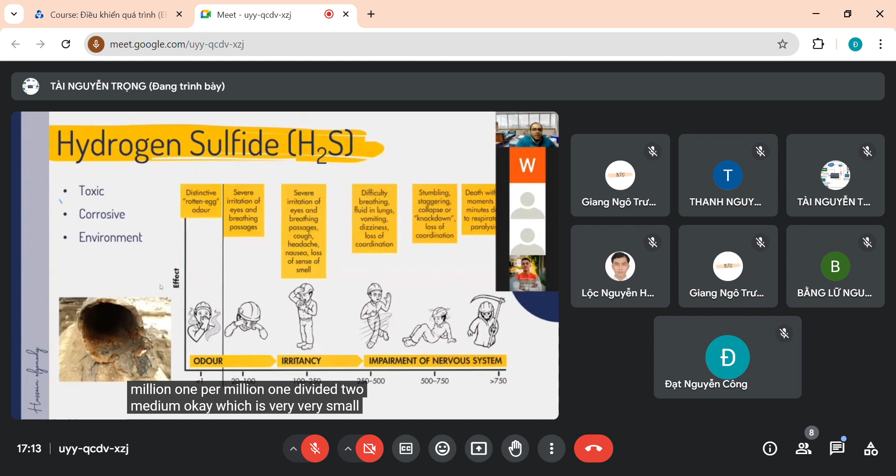Okay, the other contaminants are the non-combustible inert gases, such as CO2 and nitrogen. Why do we need to remove them? Because they have no value. They reduce the heating value of the gas, and they also take valuable space in the pipeline. Sometimes CO2, when mixed with water, becomes very corrosive to the pipeline and equipment. Okay.

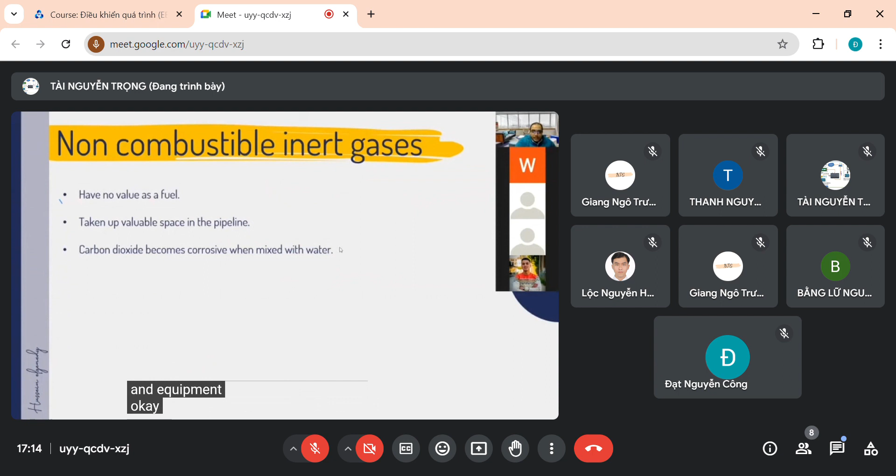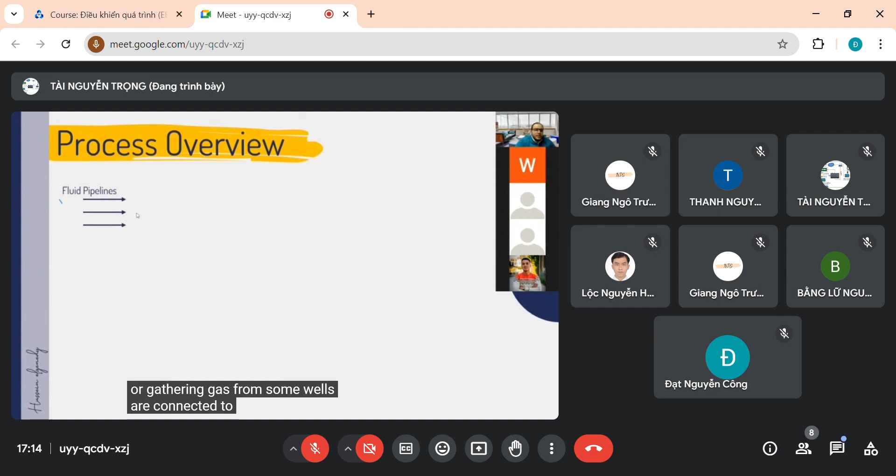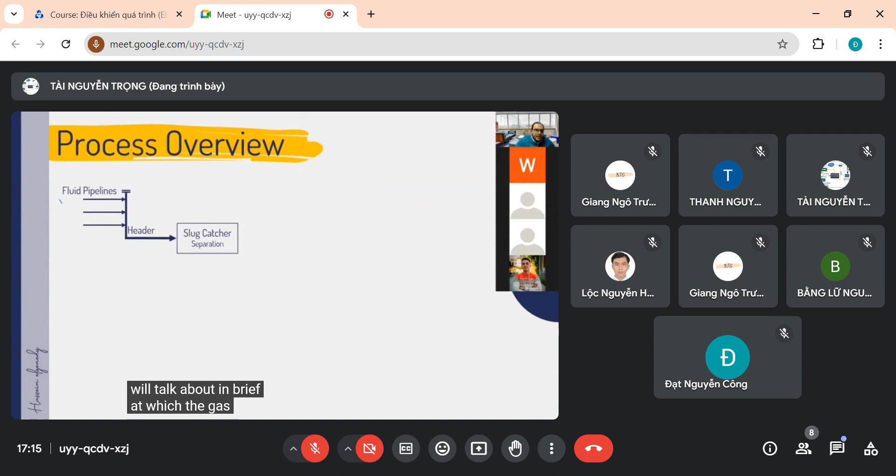Let's take a brief overview of the gas plant. In the gas plant, we have fluid pipelines, such as gas pipelines coming from different wells, which are collected into a gas header. The header is a bigger pipeline which collects the gas from different pipelines. After that, the first thing in the plant is the slug catcher. The slug catcher is a separation process, which we will talk about briefly, in which the gas is separated from liquid.

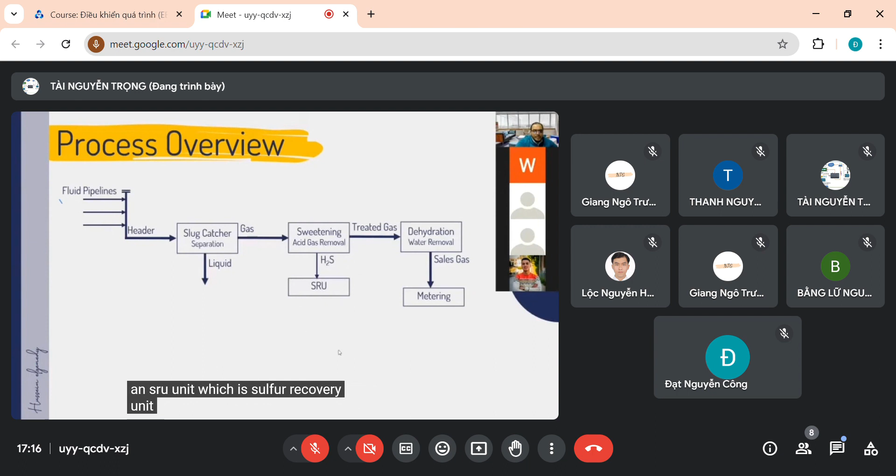After that, if the gas is sour, it goes through sweetening, or acid gas removal. Then the treated gas from sweetening enters the dehydration, or water removal, process. After dehydration, the gas is called sales gas, and it goes to the metering station, where we count the gas being sold. From the sweetening process, we have a byproduct, which is H2S extracted from the gas. The H2S is sent to an SRU, a sulfur recovery unit, where we recover the sulfur from H2S, and it can also be sold in the market.

The liquid portion is sent to further separation, because the liquid is mostly condensate, water and MEG. We will talk about MEG briefly in a moment. So the liquids go to separation. Mainly the condensate is sent to stabilization, and to metering to be sold as stabilized condensate. The water is sent to two important units, the SWS and MRU. SWS is sour water stripping, and MRU is the MEG recovery unit, where we recover the MEG. The SWS produces waste water without H2S, which may be reused in the plant or sent to disposal. Okay.

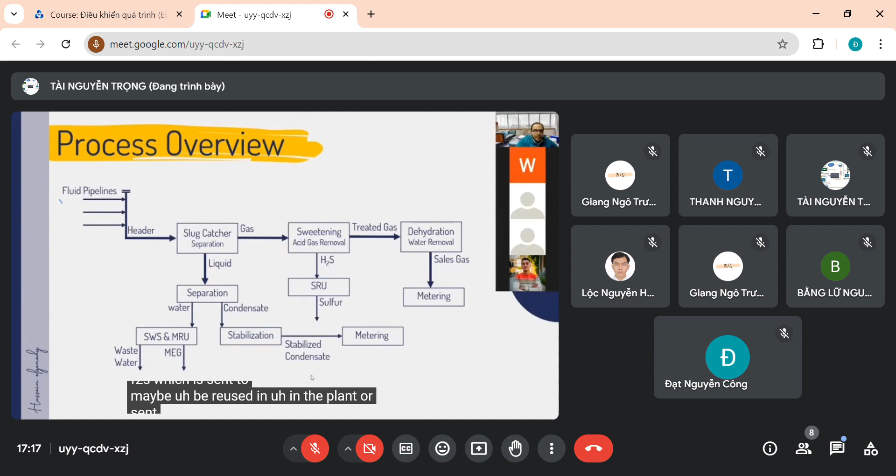The first unit in the plant is the slug catcher. What is the importance of the slug catcher? It acts as slug control. Sometimes, due to ramp-up and ramp-down of the well, we receive slugs of water or liquid, which we cannot handle with normal separation. So we use a separator called a slug catcher, a finger-type separator like this, which can handle the high amount of liquid coming from the wells. It is the first line of defense when it comes to liquids and slug control.

So when we are separating gas from liquid, we have to use something like that, especially when we expect the amount of liquid to change from time to time, and especially when the sea lines or fluid pipelines are far from the plant. For example, in our plant, Zohr gas plant, the wells are 200 kilometers from the plant. That's a very long distance. So sometimes liquid comes in slugs, and we need the slug catcher at the inlet. It also helps separate the liquid from the gas.

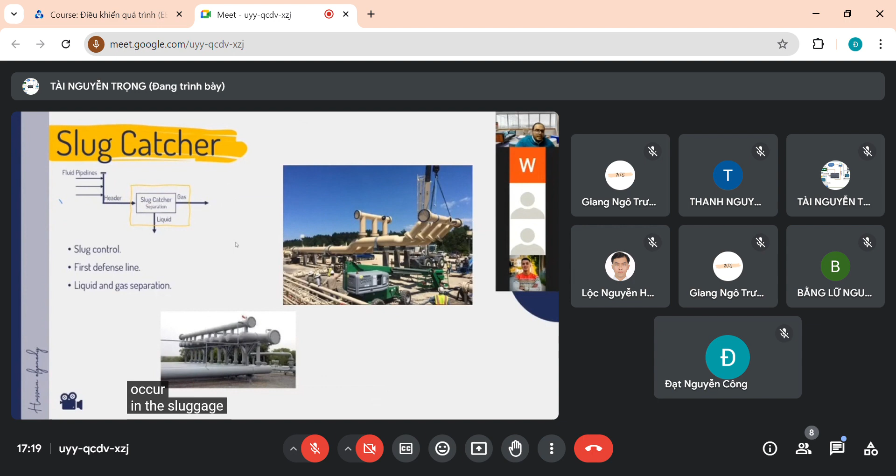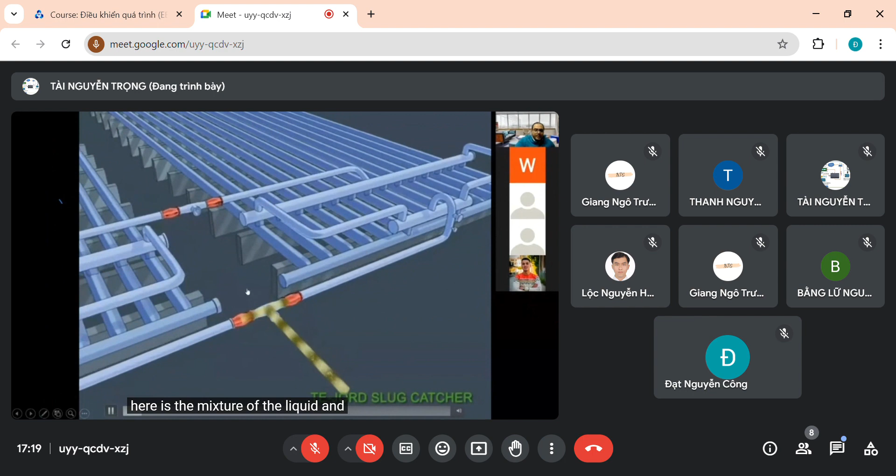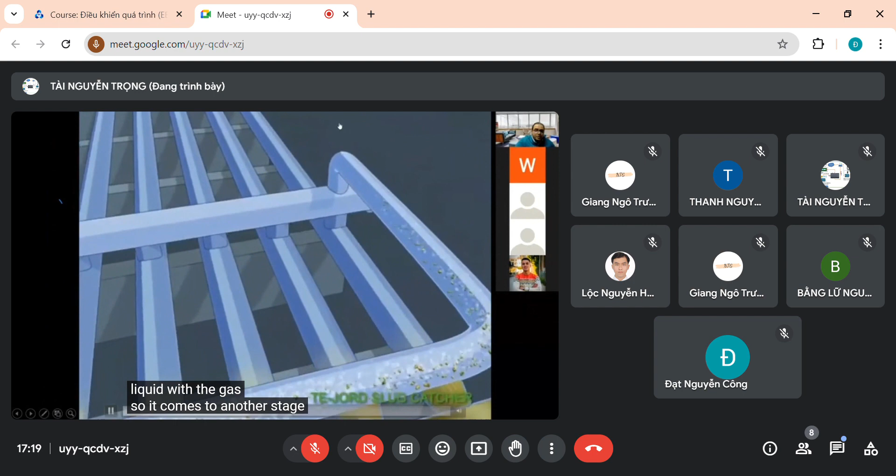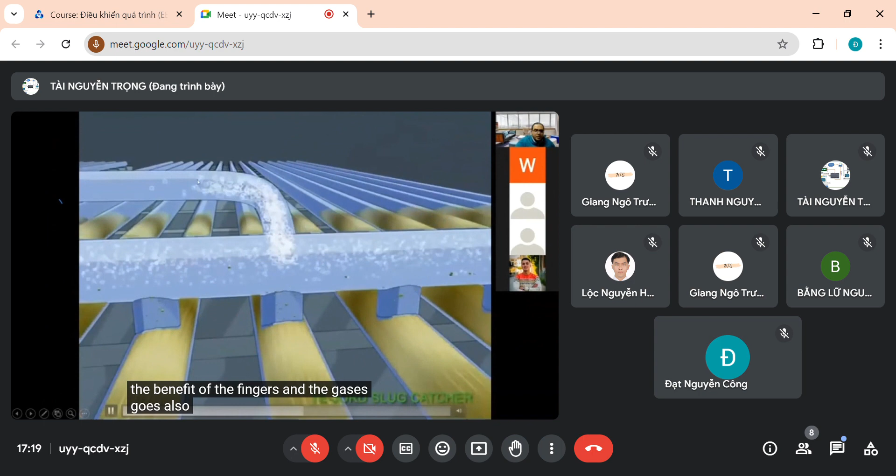Let's check this small video about the slug catcher to understand how separation occurs. Here the mixture of liquid and gas enters the slug catcher and moves like that. This is the first separation stage. The liquid goes down and the gas goes up through this pipeline. As you can see, there is still some condensate with the gas, so it comes to another stage of separation, where the liquid condensate goes down by gravity. This is the benefit of the fingers, and the gas goes up again and moves to a separate pipeline like this.

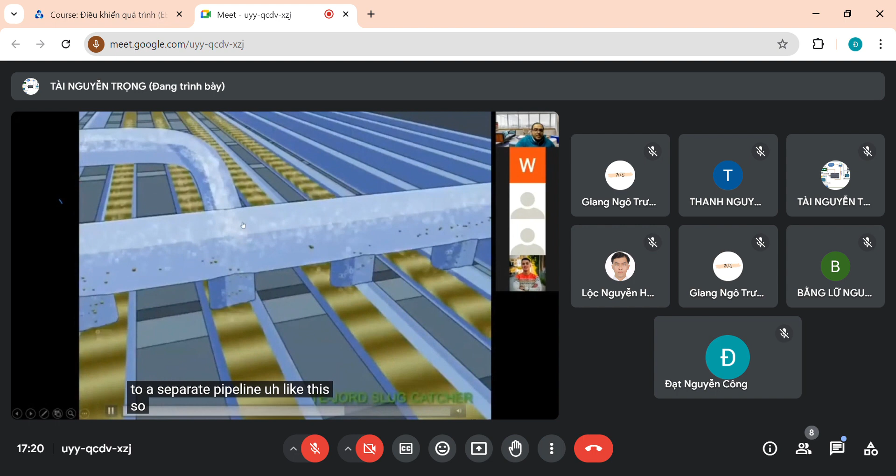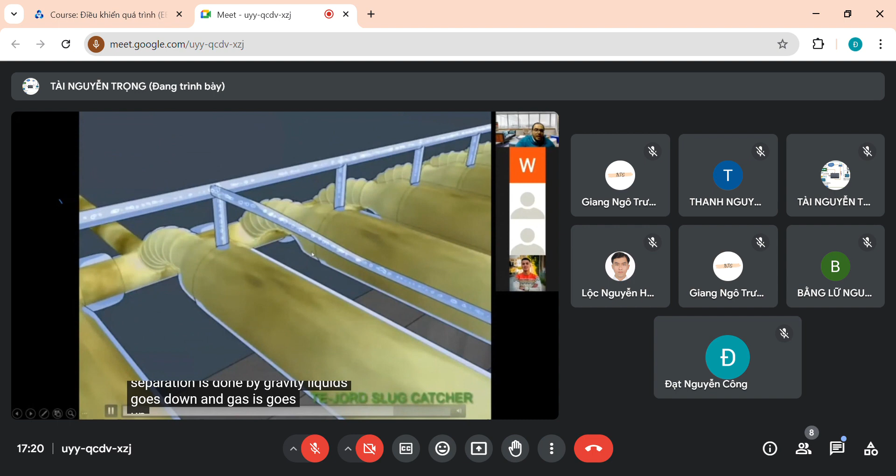So this is the importance of the fingers. These are called fingers, and the separation is done by gravity. Liquid goes down and gas goes up. This is the idea of the slug catcher. As you can see here, the gas is collected above and sent to processing, and the liquid separated from the gas is sent to further separation and the condensate stabilizers. Okay.

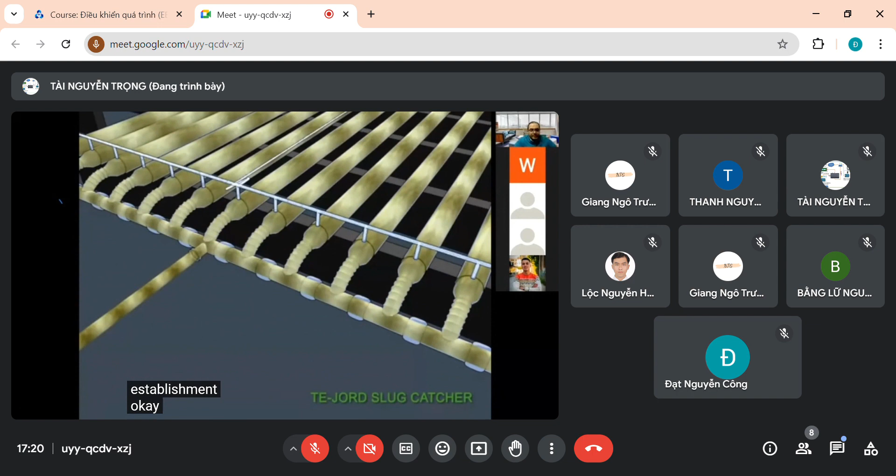The next process is the sweetening unit or the acid gas removal unit. The main purpose of the acid gas removal unit is to remove the H2S, but sometimes CO2 is removed with the H2S based on the solvent selected or the process selected. The most common sweetening process is the amine sweetening process.

The amine sweetening process consists of the absorber and the regenerator. In the absorber there is contact between the gas and the amine, which absorbs the H2S from the gas, and then it is sent to regeneration to separate the acid gas from the amine. The amine is sent again to the cycle, and the H2S goes to the SRU, and from the top the sweet gas is taken from the absorber to be sent for further

processing and dehydration. Can anyone tell me why it's important to do the sweetening process before the dehydration process? Anyone know why we do the sweetening process before the dehydration process? Anyone?

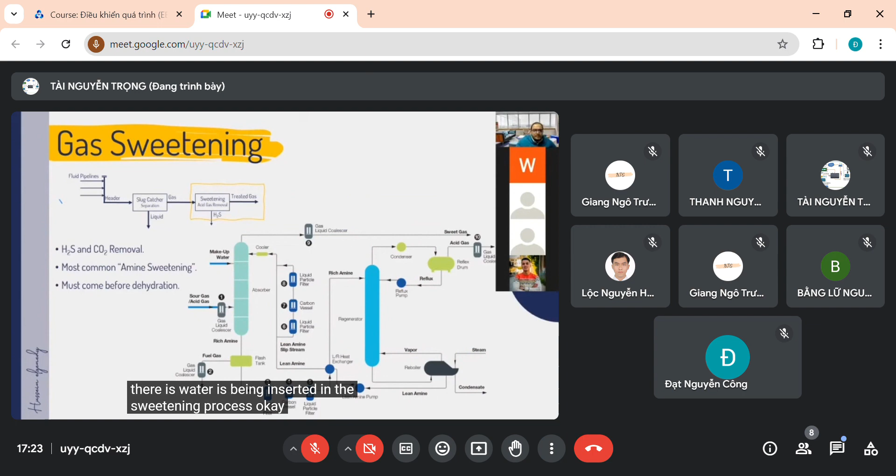Okay, the dehydration process is mainly the same as the sweetening process, but with a different solvent. Here we are using glycol, while in sweetening we are using amine. But there are two different types of operations in dehydration. One of them is absorption, which is done by glycol, and the other operation is adsorption, which is done by solid desiccant, such as silica gel or molecular sieve.

The purpose of the dehydration process is to remove the water and dew point control. As we know, the dew point of the gas differs based on the amount of water in the gas. When the amount of water decreases, the dew point of the gas decreases, which is very important because the hydrate formation temperature is also based on the dew point and the water content of the gas. When we reduce the dew point, we protect the gas from hydrate formation. This is the main purpose of the dehydration unit.

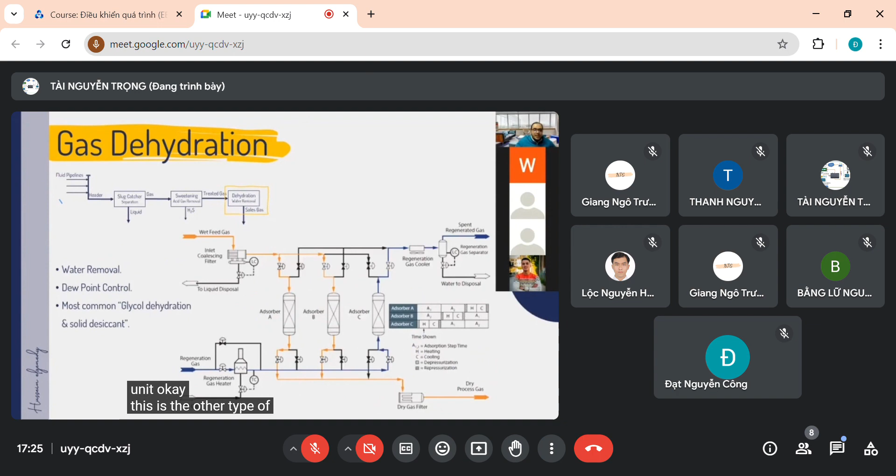Okay. This is the other type of dehydration unit, which is adsorption by molecular sieves or silica gel. Okay. After that, it comes to metering. A metering station is just an assembly of valves and flow meters in a certain way, and instrumentation also.

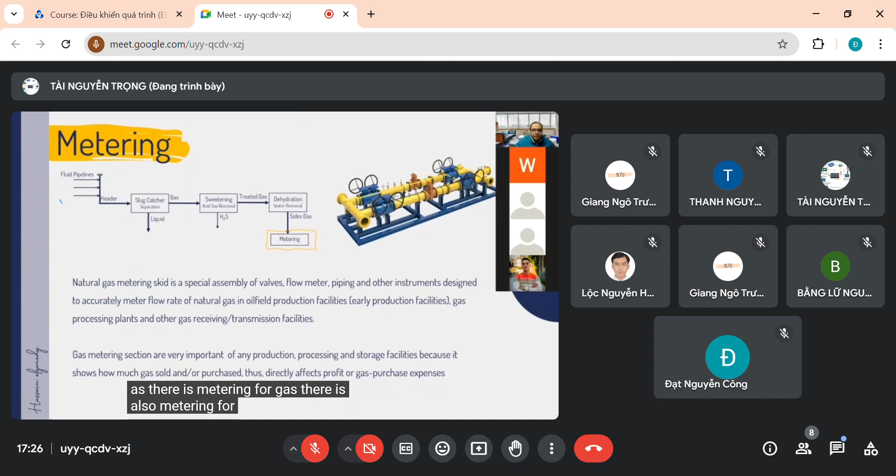The importance of the metering station is that you have to calculate or know how much gas you produce, sell, or receive from your company to the other company. That's why it's important to install the metering station in the gas plant. It's important in selling or purchasing the product. And as there is metering for gas, there is also metering for the stabilized condensate. Okay. After that, it comes to the SRU or sulfur recovery unit.

The H2S out from the sweetening unit is sent to the sulfur recovery unit. The most common sulfur recovery process is the Claus unit, which consists of a thermal reaction and afterward a catalytic reaction, in which the H2S is converted to liquid sulfur, and after that we can convert it to solid sulfur. Okay, and it is important also for the environment.

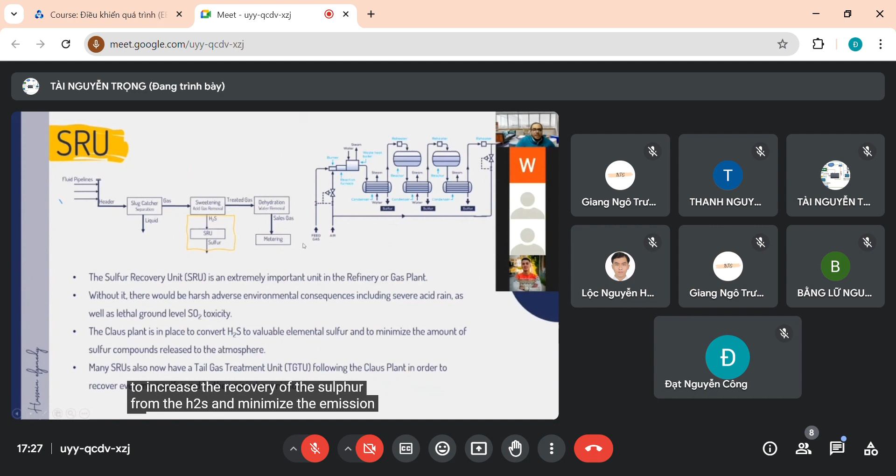The SRU unit is very important for the environment, and recently there is also a unit called a tail gas treatment unit, because the conversion inside the SRU is not 100%. There is a residual gas or tail gas. Recently, a lot of plants are installing a TGT unit, or tail gas treatment unit, to increase the recovery of sulfur from the H2S and minimize the emissions. Okay.

As we mentioned, liquid coming from the slug catcher or separation or the well consists of oil and water and sometimes MEG. When we are talking about MEG, the MEG is monoethylene glycol. Some plants are using monoethylene glycol, injecting the MEG into the well to inhibit hydrate formation. After injecting the MEG into the well stream, it comes to the processing plant for recovery, to recover MEG from the liquid.

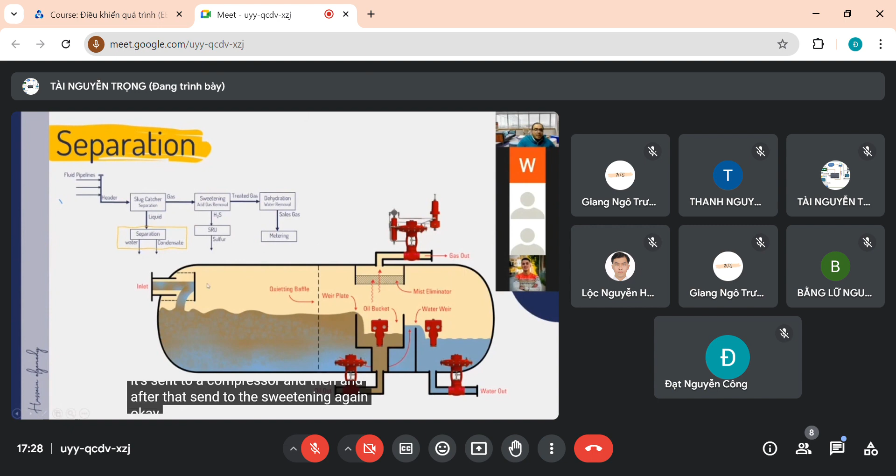So here in the separation, we are separating the liquid into water and MEG together, because water is mixed with MEG, and oil. Oil is mainly the condensate, which is sent to the stabilization. And also there will be some gases going out from our stream. It's sent to a compressor and after that sent to the sweetening again. From the separation, we take the condensate to the stabilization unit, at which we can produce the stabilized condensate.

The main purpose of stabilization is to remove the H2S and remove the lighter components from the condensate. So we remove the acid gas, we adjust the RVP, which is the Reid vapor pressure, and we also have to meet the specs. The specs for the liquid are H2S 10 ppm, and the RVP up to 15 psi, depending on whether it's summer or winter. Summer should be a little lower, maybe 8, and in winter up to 15. As the lighter components increase, the Reid vapor pressure increases, and this allows the engine, especially in winter, to start more easily.

This stabilization process is just like fractionation or distillation. It's a heating process and then separation based on the boiling point. This is a very simple BFD of the stabilization process. The last point is which medium is used in the exchanger. There are a lot of mediums we can use in the exchanger. Here we can use the product instead of using a cooler; we can use the product to be exchanged with the inlet stream, or you can use steam.

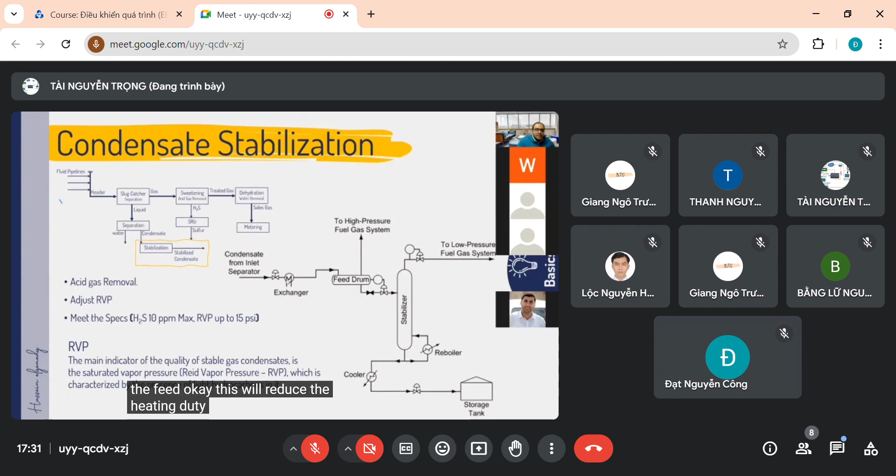For example, at our plant in Zohr Gas Field, we are using steam. Some other plants are using hot oil instead of steam. So there are a lot of variants we can use in the exchanger. But the most economical option is to use the hot product to be exchanged with the feed. This will reduce the heating duty and reduce utilities such as steam or hot oil.

The last operation in our plant will be the SWS, sour water stripping. Sour water stripping is more or less like stabilization, but we are removing H2S and lighter components from the sour water, and then we can reuse it or send it to disposal. SWS is very similar to the stabilization process.

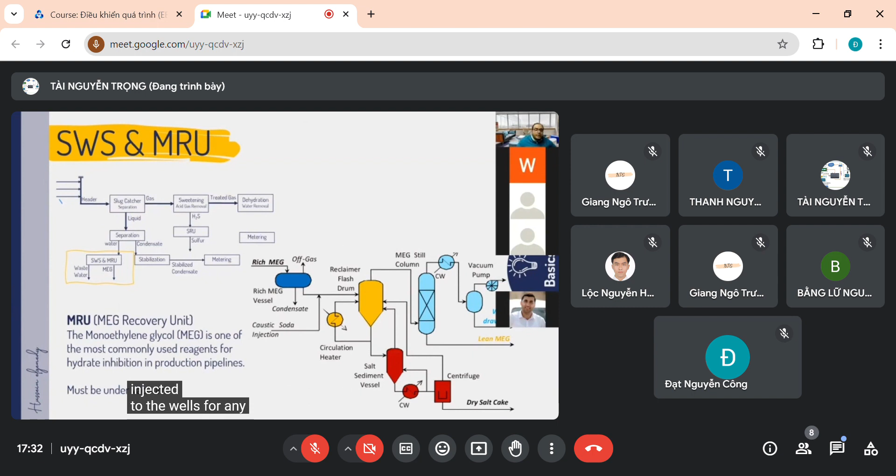The last operation is the MRU, which is the MEG recovery unit. As we mentioned, monoethylene glycol is injected into the wells for hydrate inhibition, and after that we recover the MEG because it's very expensive, to be re-injected again in the system. This process also consists of heating and fractionation. But the most important thing is this process must be done under vacuum. Can anyone tell me why this process must be done under vacuum? This is the last question.

Okay, I will answer. When we reduce the pressure, what will happen to the boiling point of the component? It also reduces. So when we are fractionating the MEG, we are using vacuum to reduce the boiling point of the MEG. Why are we doing this? Because the degradation temperature of the MEG is very close to the boiling point. The degradation temperature means the MEG reaches a point at which it cannot be reused; it will be degraded, not valuable anymore, and cannot be recovered.